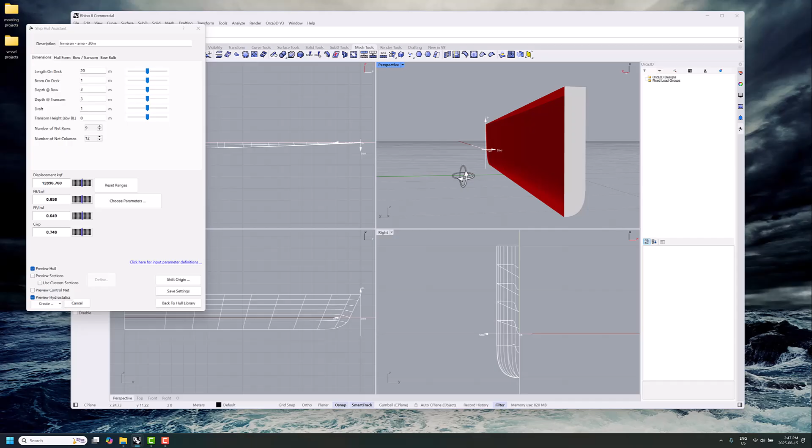Now, speaking of displacement, if we just preview the hull here, you have to be a little bit careful because when you're looking at the preview of the hydrostatics, it's only going to be the individual hull components, not the whole trimaran. So you have to kind of manage that separately a little bit. But you can see here this AMA is around 13 tons.

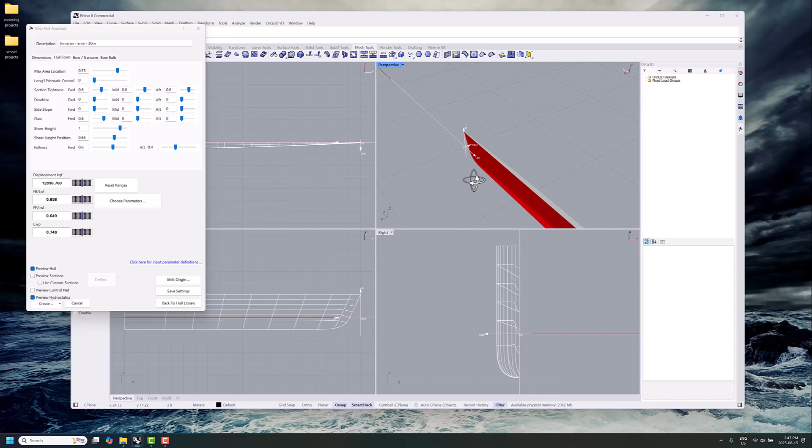And again, the real advantage of Orca3D here for Hull Assistant is all the functions and features you have for adjusting the hull form factor to however you want. I've got a pretty basic shape here. And we'll go back to dimensions, set the draft to 0, and turn off the hydrostatics.

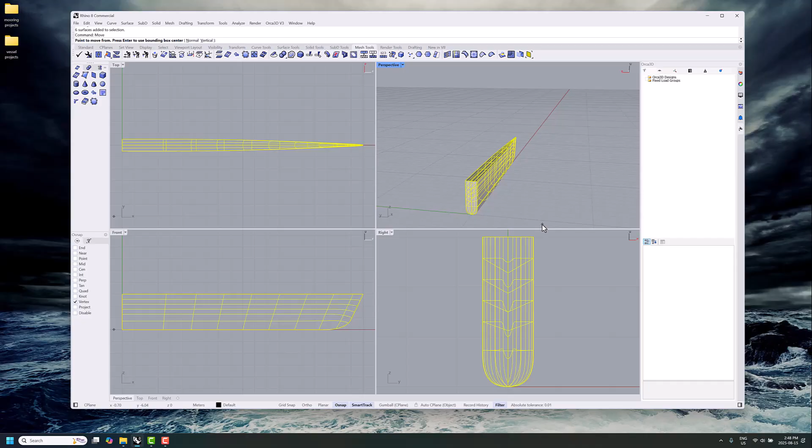And so what we want to do here is go create, and then we want the full model for the AMA. And then we're going to put it off to the side. So we'll select the whole thing, go move 0, 0, 0, and then point to move to 0, 5, 0. So that's going to give us roughly our 10 meter beam with that spacing.

And then we'll go to Orca3D hull design again, and we'll do the main hull. So we'll go down to my trimaran here. This is my own naming convention here. I just put trimaran 30 meters, even though the AMA is not that long. I just wanted to remind me that they're part of the same 30 meter trimaran.

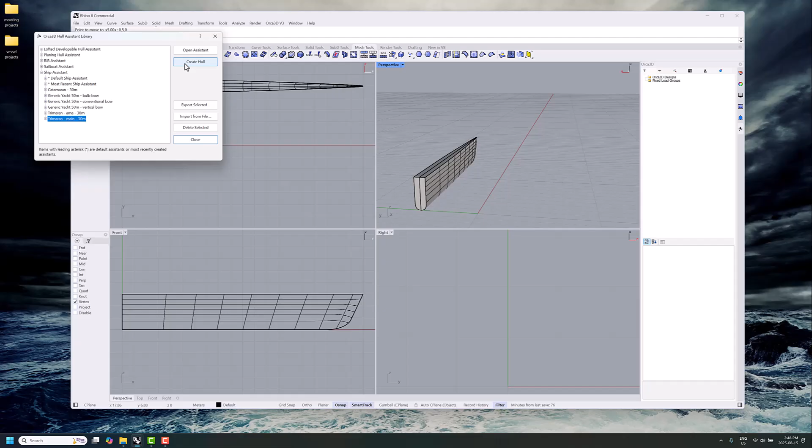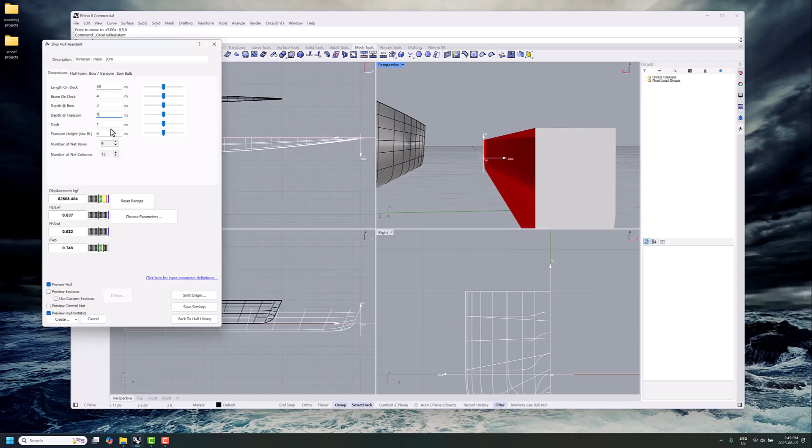So now we'll go to the main hull and go open assistant and preview the hull. You can see there's the main hull, only half of it there. And again, we'll just do a preview of the hydrostatics at 1 meter draft, sort of like 83. So 83 plus 20 and a bit for both the AMAs would get us a bit over 100 tons. Okay, so we'll go back to 0 here for that.

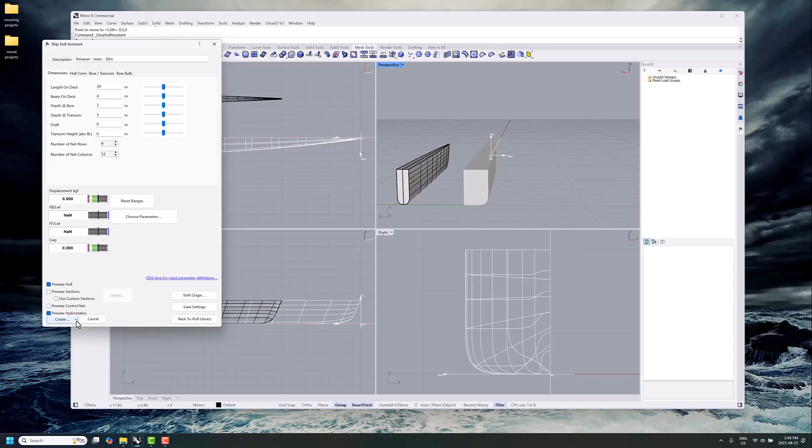And then we don't want to do the whole thing for the main hull because remember, we only want to bring in half of the hull for the whole system, and it's mirrored about the midplane inside the ShipMo3D toolset. So what we'll do is we'll go create, and then we only want port, hull, deck, and transom. And there we go. So there's our two surfaces.

Now these are surfaces, they're not a numerical mesh that we need for doing the hydrodynamics calculations in ProteusDS. So what we'll do is we'll select these separately and go quad remesh. This is going to generate our quad mesh from the surfaces. So we'll go preview, and it's going to do some calculations here.

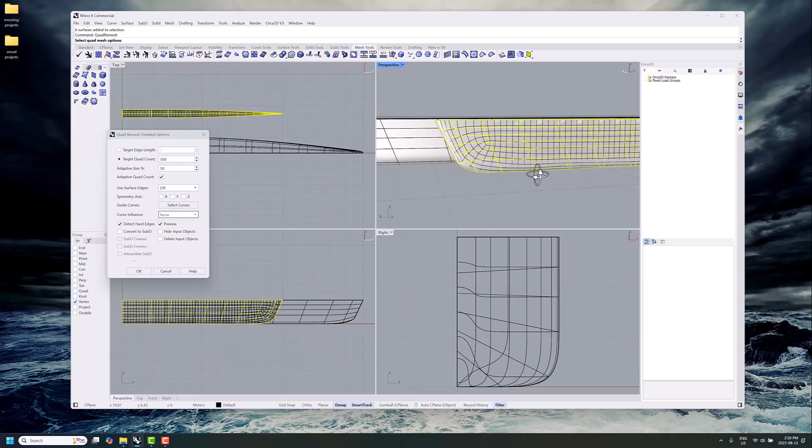And it's good to check it over. Don't assume that everything is good. Every so often there might be like a piece missing or something like that. I leave the input surfaces on, and you can kind of see how they're sort of overlapping really tightly, and we'll go hide input objects.

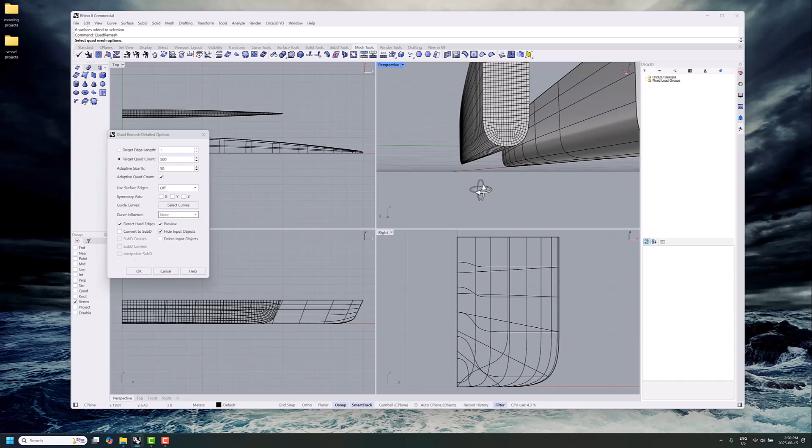All is looking well. If something looks weird and like maybe the transom's not there, try just adjusting the target quad count and it'll recalculate and often just sort of fixes itself. So we'll delete input objects as well because we don't want to keep the surface. We'll go OK. So there's our mesh of the AMA, which is great.

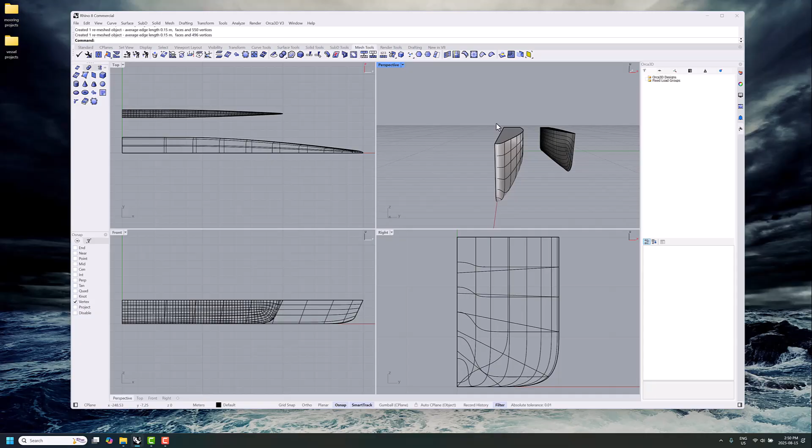And then we need to do the same for the main hull. So we'll select all that. Go quad remesh. And maybe we'll pick a few more elements for that just because it's physically bigger. We'll preview. It's thinking and making the mesh for us. It's generally looking okay, I think.

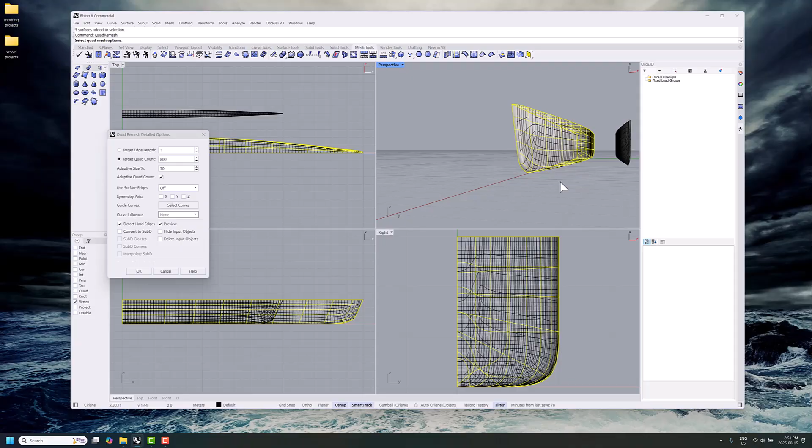There's a bit of overlap here, so we'll go hide input objects. Yeah, that's pretty much fine. And so we'll go delete input objects because we don't want to keep the surface, we just want the mesh. I see the deck's not there. I don't think that's a big deal, but maybe it would be a little bit weird.

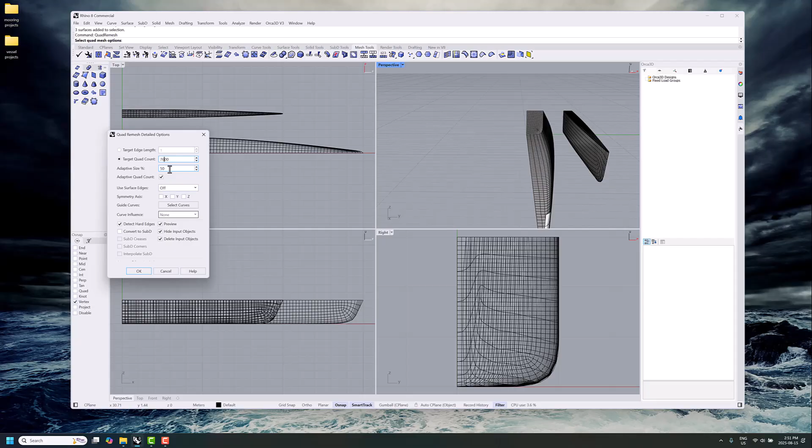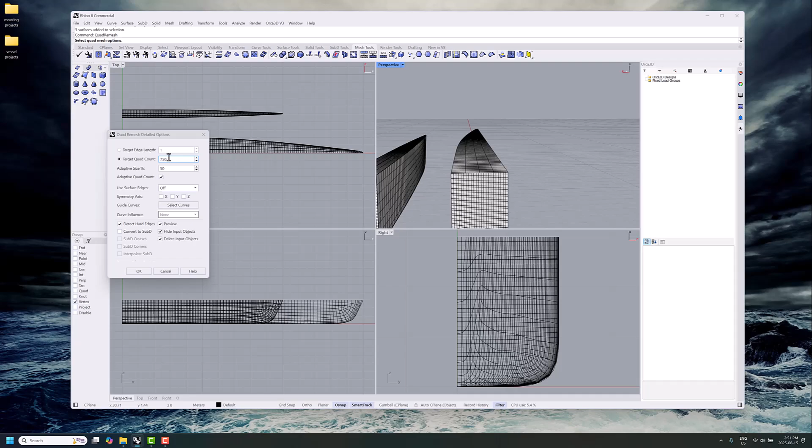So we'll use this as an example here, and we'll just change this to say 750 and get it to recompute and see if that top stays on there. Yeah. So I think that's just the way that the quad remesh algorithm is working in Rhino. If it has a little hiccup, it might have an issue, but you can sort of get it to regenerate it and try again just by using a little bit of a different mesh resolution there. So that's looking really good, and we'll go OK. And again, it's looking pretty good there.

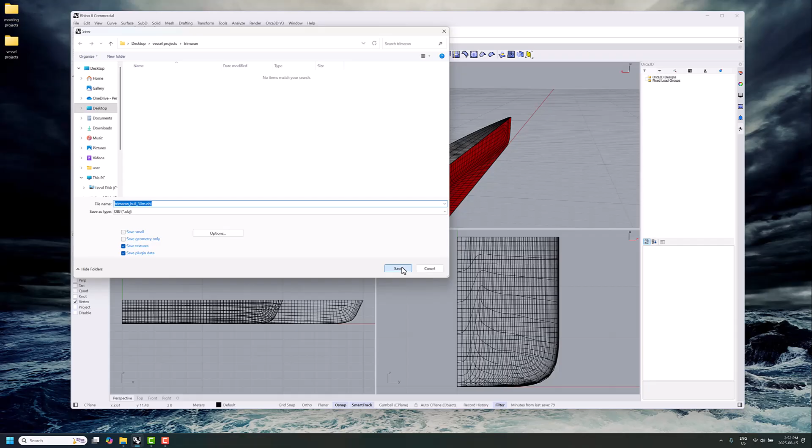So now what we're going to do is we'll go save as. And we want to do the OBJ format here. So I'm going to go trimaran hull 30 meters, OBJ. And make sure we don't have that Rhino Z to OBJ Y. That throws things for a loop.

And now let's go over to our ShipMo3D toolset, and I've sort of got an almost blank project here just from playing around before. So project data 30 meters, draft at midships 1 meter, height of CG 2, but honestly we're just playing around to get this into the workflow here. So I'll just make sure we've got the right file name here and run it.

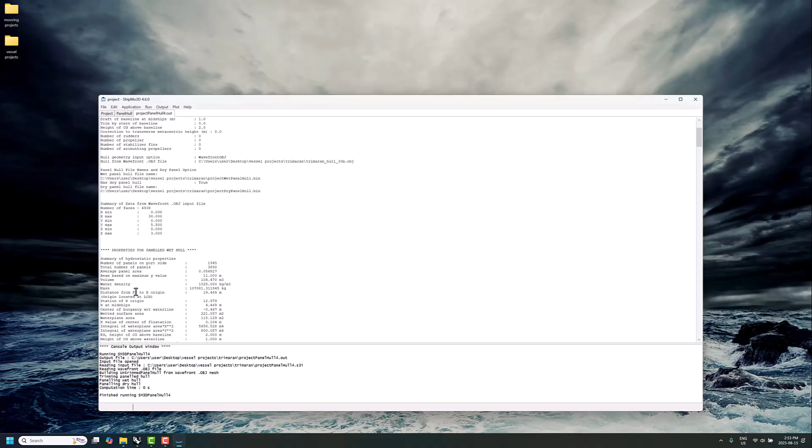And maybe if you just look at the view output here, you can see the mass based on the displacement it's counting is about 100 tons here. That's great. So let's take a look at it. Plot panel hull. And that's looking pretty good. I like the ship parts view here because it clearly shows the wet hull area. And that's looking pretty good.

So we're set to go on from here and perform some hydrodynamic calculations and seakeeping analysis. And for the meantime, this is what I wanted to cover, just how you could go about doing this in a tool like Orca3D and Rhino and bring that hull form into ProteusDS. And that's it for now.